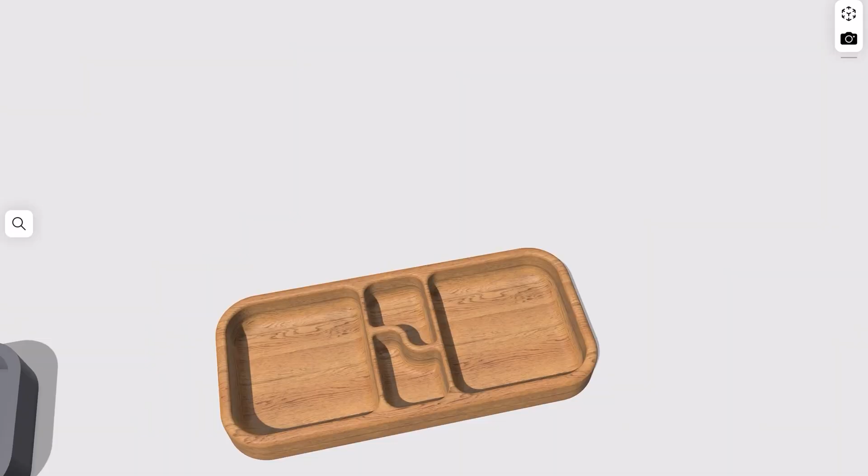I originally designed this to be a simple 2D carve with pockets and profiles, but then it got a little bit more involved. For the two big outer pockets, I gave the bottom a nice big 1-inch radius. But then I realized I don't have a bowl and tray bit with that big of a radius. As far as I can tell, there's no bit on the market that has a 1-inch radius and a long enough length of cut to reach the bottom of the tray.

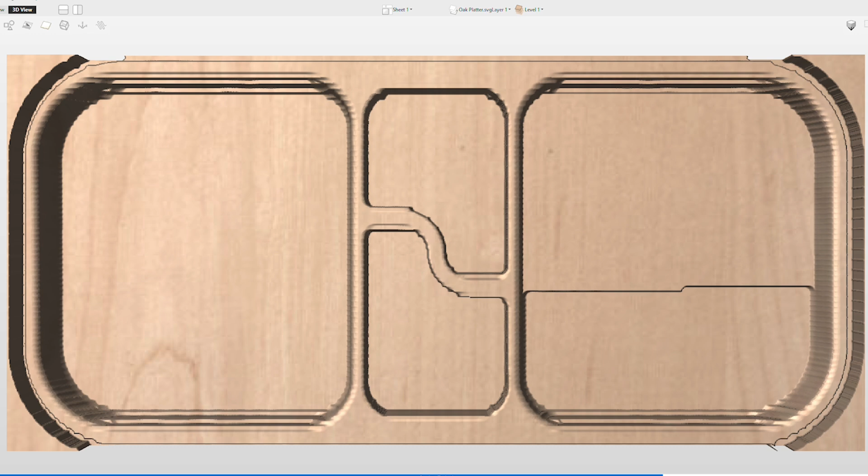So I switched gears and decided to run this as a 3D carve instead of 2D. It ended up taking longer, but that's fine. I just let it run while I was working on other stuff. So let's take a look at how it's toolpathed.

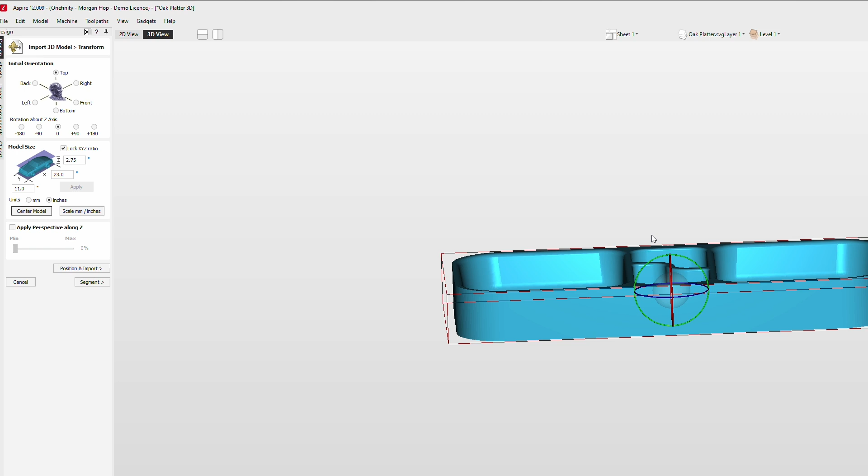I opened up Vectric and created a new project the size of my material: 24 inches wide, 11 3/8 height, and 2 3/4 thick. Then I imported the 3D model, which was saved as an STL. I centered it and made sure it was scaled correctly. As with any 3D carve, the software will automatically place the modeling plane at the center of the material's thickness, which serves as a limit to how deep it'll cut on one side of the material.

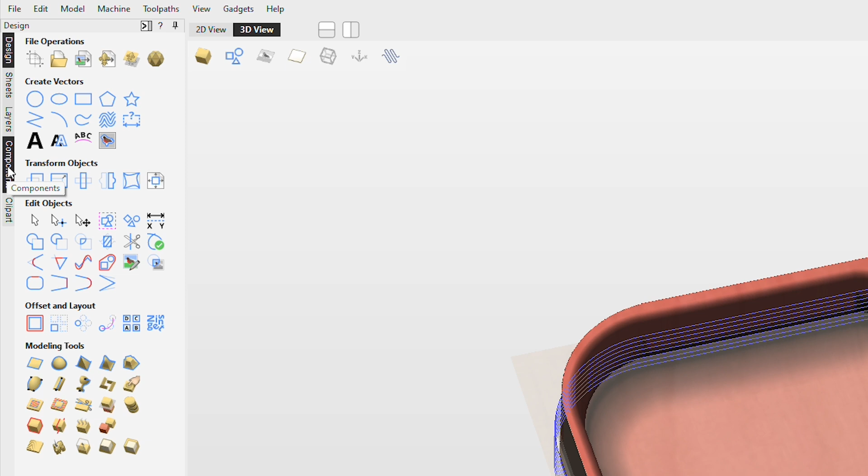The bottom of all these pockets are well below the modeling plane, so we need to change the base height. The material is 2.75 inches thick, and I want the pockets to be 2.5 inches deep. So I'll go into the Components tab over here on the left and make sure that my shape height is 2.5 and my base height is 0.25. That tells the software that the vertical position of my model is at the very bottom of the material.

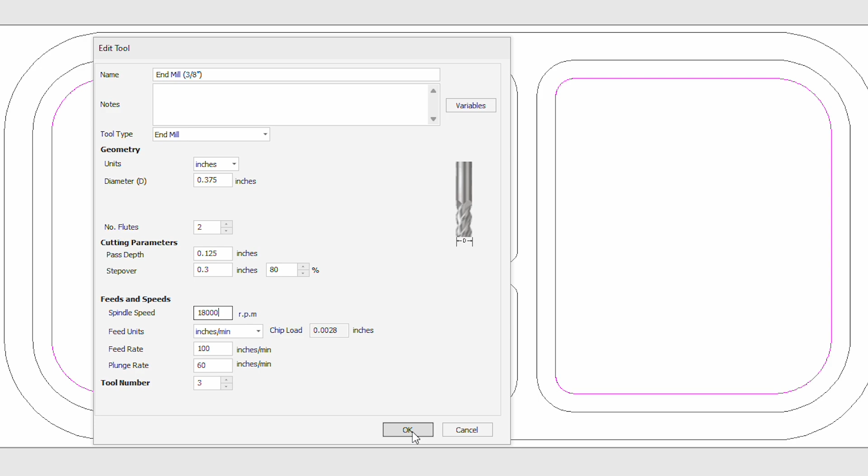I started with a 2D pocket toolpath using a 3/8 upcut spiral bit just to hog out a lot of the waste before running my 3D toolpaths. I had the bit running at 18,000 RPMs, 100 inches per minute, cutting 0.125 inches deep per pass. And that's real conservative, but because of the physical properties of oak, it has a tendency to tear out.

So the limitation isn't the machine, the spindle, or the tool. I'm just taking into account the nature of the material. Just because your machine can handle the workload, that doesn't mean the material can. So it's always important to be mindful of that when you're setting up your toolpaths.

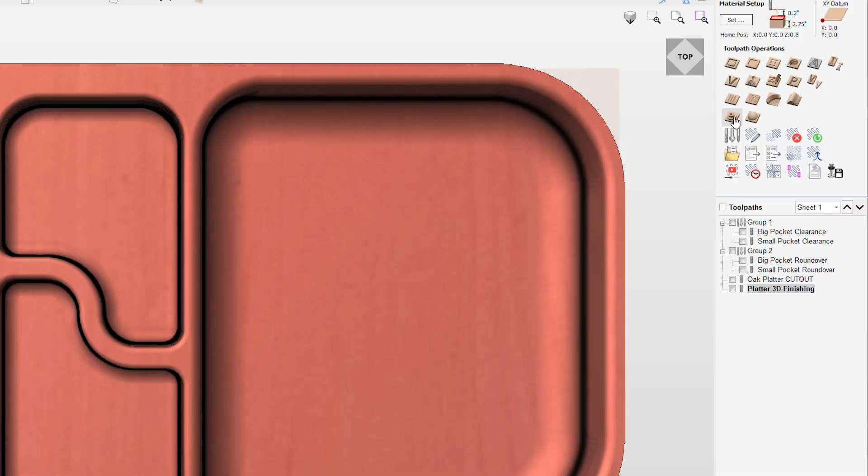After those pockets, I created a 3D roughing toolpath using the same bit. The bit settings are the same, and here I used a Z-level roughing strategy as opposed to a 3D raster. The machining limit boundary is set to the model boundary with a boundary offset of 0.25 inches. Okay, let's go ahead and preview that. Terrific. It's ugly as sin, but remember, it's just a roughing toolpath.

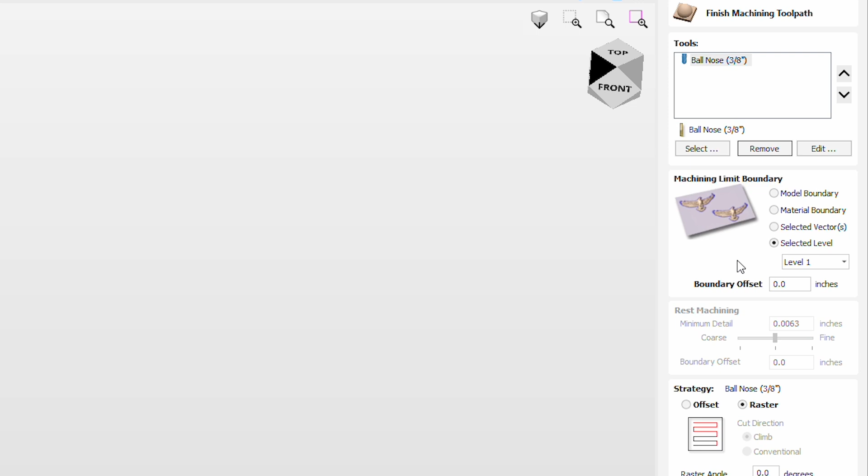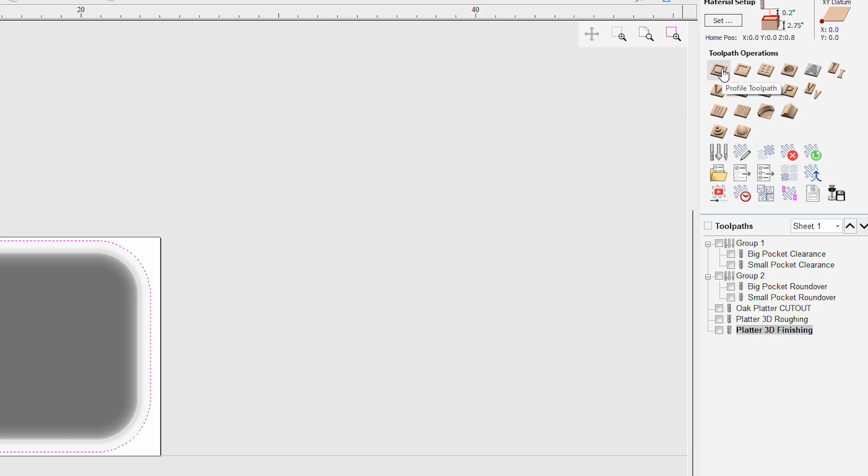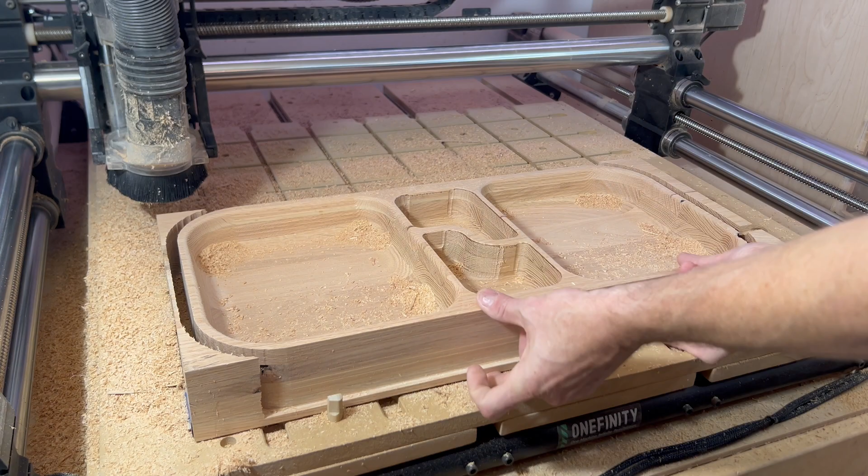Then lastly, I created a vector around the model and a profile toolpath to cut the whole thing out. I used the same 3/8 spiral bit that I used for the roughing toolpath with the same settings, and I set the total depth to 2.5 inches. I knew I'd be routing a chamfer around the bottom edge after pulling it off the machine, so I didn't mind a little bit of waste hanging off after separating the part with a jigsaw.

After that, I brought it over to the router table and beveled the bottom edge with a 30-degree chamfer bit. Then I flipped it over and hit the top edge of all the compartments with a 1/4 inch roundover bit, sanded it, and slathered some finish on it.